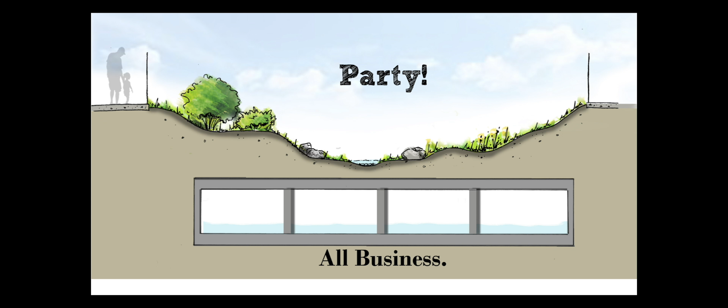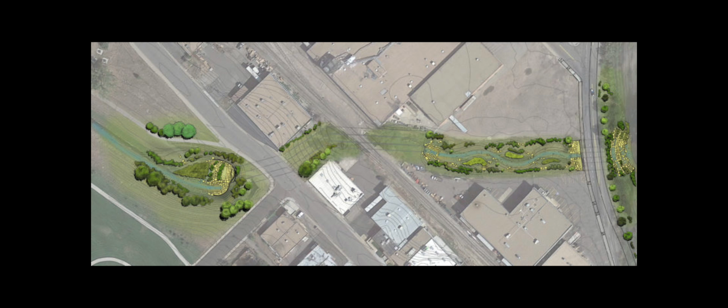However, as compelling as a mullet may be, we're actually here to talk about a reverse mullet, if you will. Party on the top and business on the bottom. The improvements at Sanderson Gulch in Denver include a sinuous open channel stream with ecological diversity, improved habitat, and water quality, which sounds like a party.

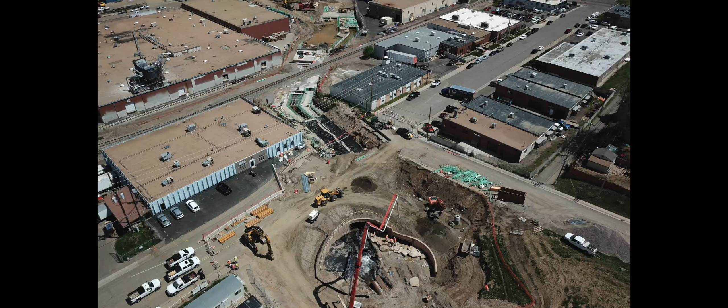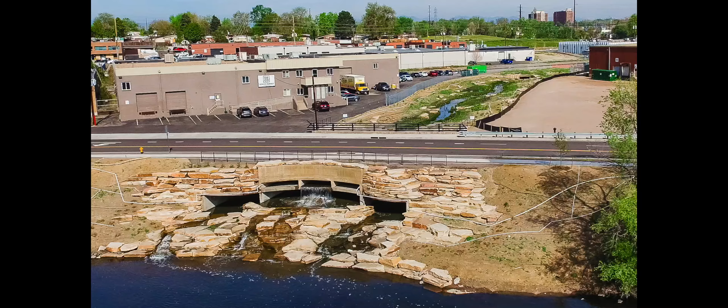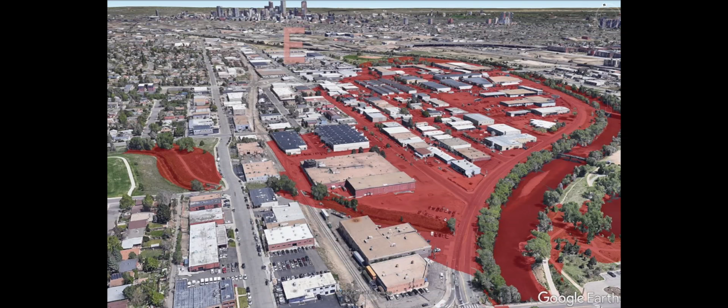All of this is layered on top of a network of braided box culverts for flood conveyance, which is all business. Sanderson Gulch is a complex stormwater system with enhanced open space and stream function for small rain events and box culverts to bypass large storms. These improvements result in the containment of 100-year storm flows and removed 107 parcels, including 102 structures, from the regulatory floodplain, reducing risk for businesses and residents in the area.

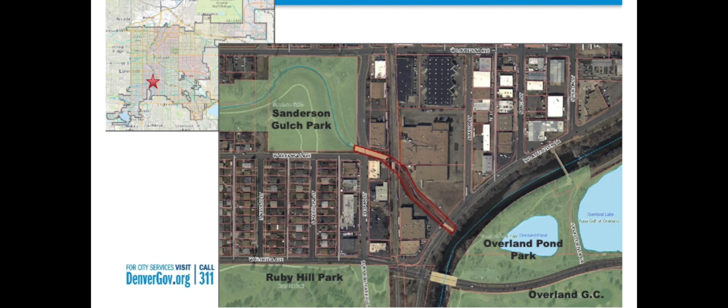I'd like to orient you on where we're at in the city and county of Denver. Right now we're at Sanderson Gulch's outfall to the South Platte River. Sanderson Gulch is a tributary channel to the South Platte River. The project extents basically go from the confluence where we're standing right now up to Sanderson Gulch Park, which is near Lipan Street. To the south of the project location, you have Florida and the Ruby Hill neighborhood, and to the east, you have Overland Pond Park.

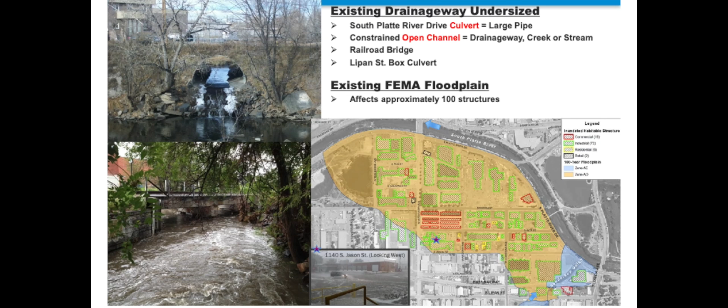What I want to talk to you about is the existing conditions before we got to this point. The channel through this highly industrialized area had undersized culverts. It crosses a BNSF bridge that was dilapidated and looked like it was ready to fall into the creek. The channel and the culverts from Lipan on down were basically undersized. So we ended up with overtopping of Lipan Street and South Platte River Drive on a frequency of a 10-year event. So we knew that we had a highly constrained, channelized section with a frequent flooding history.

After the 2013 floods, the city and county of Denver identified this as an area where they'd like to reduce flood risk. So the city's primary goals were to reduce flood risk, increase conveyance capacity, and create a high-functioning, low-maintenance stream in a highly urbanized area. Some of the secondary goals as we got into final design were increasing water quality in the area via trash vaults and through the vegetation in the channel that we created upstream of the outfall.

The city applied for a hazard mitigation grant, and through a string of events in the design process, they were able to secure about $7.2 million of funding, which greenlit the design of the project. At that point, the Mile High Flood District partnered with the city and county of Denver. Icon Engineering developed a fantastic project team to take a holistic approach to making this corridor better. All of these goals needed to be achieved while adhering to federal and state grant requirements on a very strict schedule, both for design and construction.

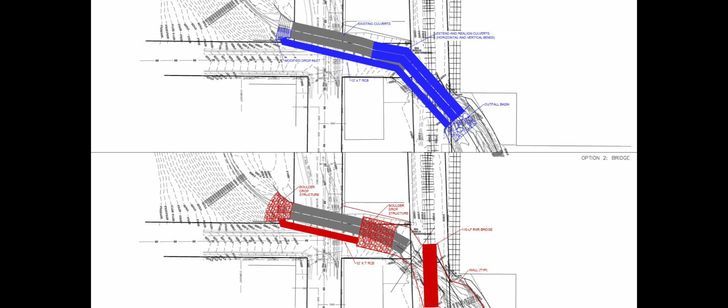The project design team looked at many alternatives for conveying a large amount of stormwater through this confined space. We looked into nearby land acquisition and the feasibility of adding more upstream detention to reduce the peak flows. These alternatives were found to be cost prohibitive and too time consuming for the project and grant timeline. Additionally, we evaluated many culvert arrangements and bridge replacement options for the railroad and 2 roadway crossings through this reach.

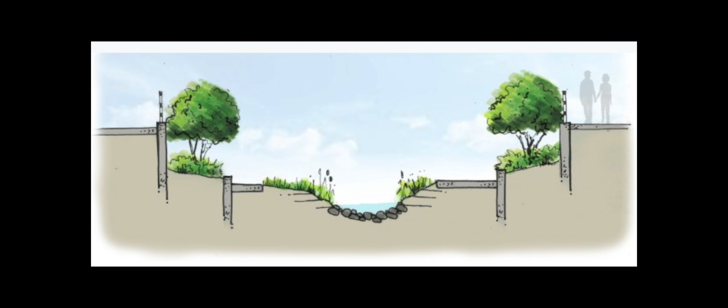Several variations of high-capacity open channels were considered as well. Unfortunately, these options included tall retaining walls with confined channel conditions, significant flow depth with high channel velocities and shear potential, future maintenance challenges, and other safety concerns. And the project goals were just not being met. The design team recognized that more innovation and creativity was necessary.

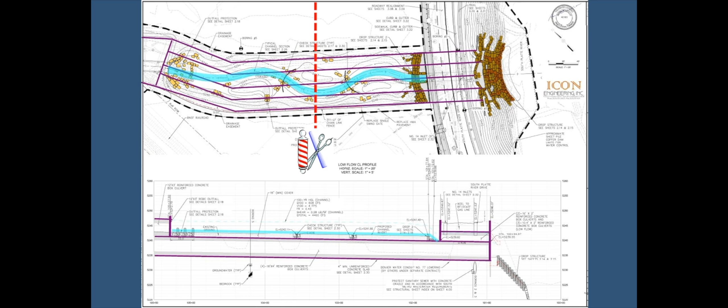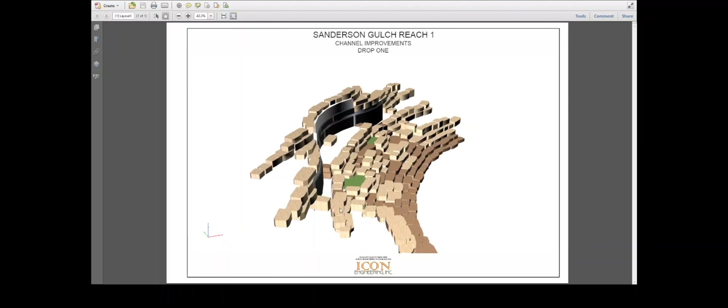We started developing a concept that includes functional open space with an active channel that also includes a complex stormwater bypass system below it for safely conveying larger storm flows. The design elements became complicated, and as part of the process, we developed 3D design models for the large network of culverts and for the boulder structures in the channel. This allowed the team to envision scenarios and figure out the best configurations for design. It was also helpful to provide these visual aids to the contractor for construction.

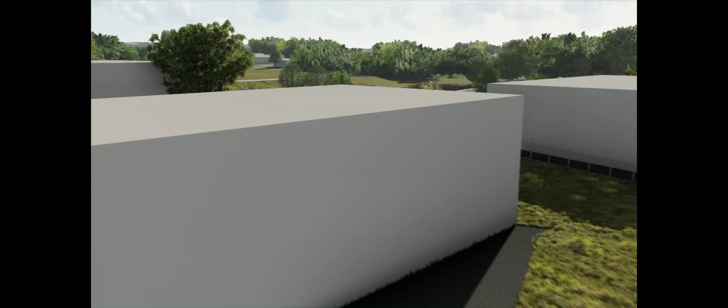Let's take a closer look at the new stormwater system with a digital flyover. The project includes a signature boulder outfall structure at the South Platte River and a meandering multi-stage channel with diverse vegetation. Below the channel and road crossings is a network of culverts that are important for providing capacity to convey large flows. At the upstream end of the project, Sanderson Gulch changes from an old concrete-lined channel into a new step pool structure and naturalized channel.

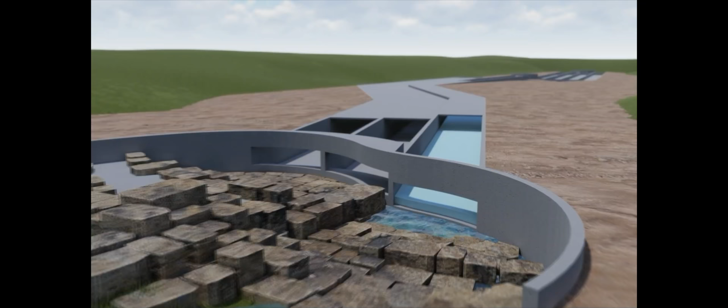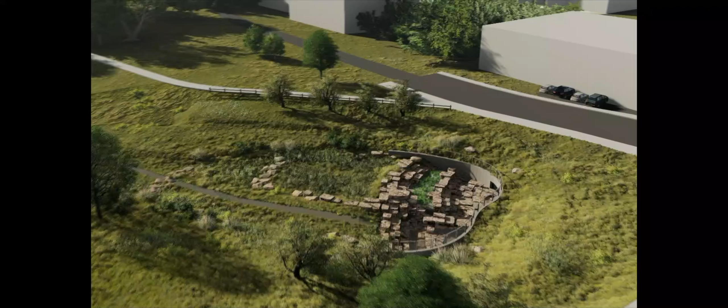As flows approach South Lipan Street, a complex drop structure diverts the base flows and small storms into a water quality vault and 12x3 box culvert. This low flow culvert extends below the roadway and railroad and daylights to the natural channel downstream. Then at South Platte River Drive, the low flows are conveyed through five 2-foot tall box culverts and cascade onto the South Platte River outfall structure. The low flow portion of this system is anticipated to convey a maximum of 600 CFS, which is less than a 10-year storm recurrence.

During major storm events, the upstream boulder structure redirects high flows into two 14x8 box culverts. These high flow culverts transition to four 16x4 box culverts underneath the low flow channel. Total capacity for the combined system is around 4,500 CFS, which will allow for future storm outfall projects upstream and accommodate future 100-year flows.

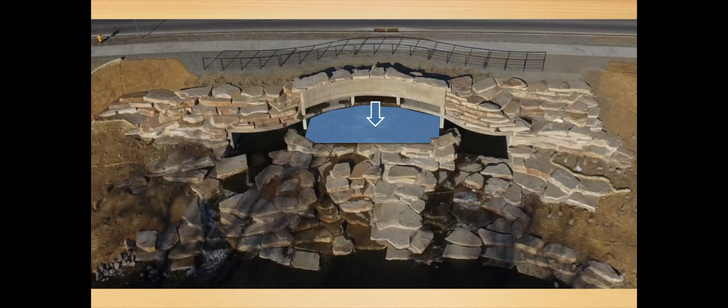At the outfall to the South Platte River, the channel acts as a waterfall from the upper culvert cells and splashes into a center pool. The flows then spill laterally and fill the lower pools on both sides. These pools help dissipate energy, collect sediment and debris, and also serve as a deterrent for culvert entry by people, although the crawdads and minnows seem to enjoy it. Finally, there are several flow paths for water to cascade through the slabstone boulders and down into the river.

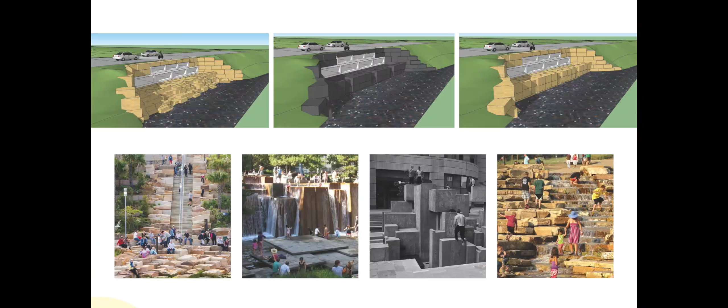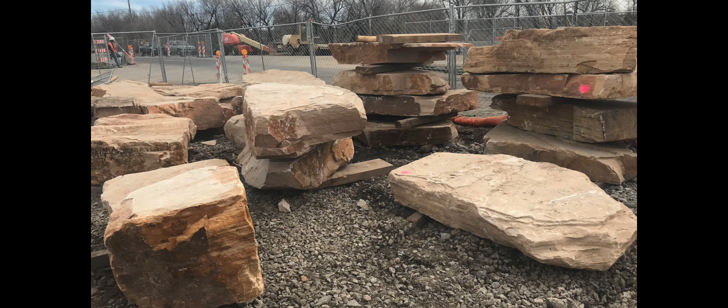As Aaron mentioned, we went through many design iterations to land on the concept for the project. We also went through many iterations to land on the aesthetic design for the project. So as you can see, we've got these very large boulders throughout the entire project. These are a common theme that we use to tie the whole project together. So we began the design process by looking at various material options, including sculpted concrete, standard granite boulders, just standard concrete with form liners. And we finally decided that we really needed to push the limits here.

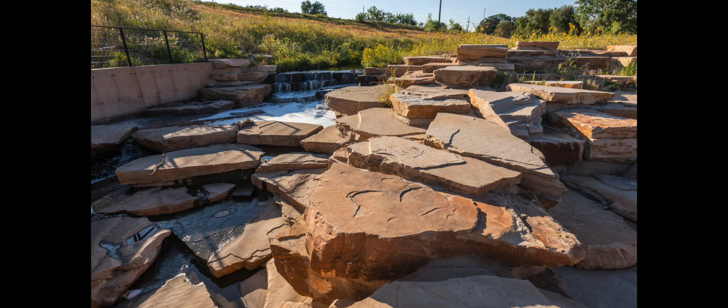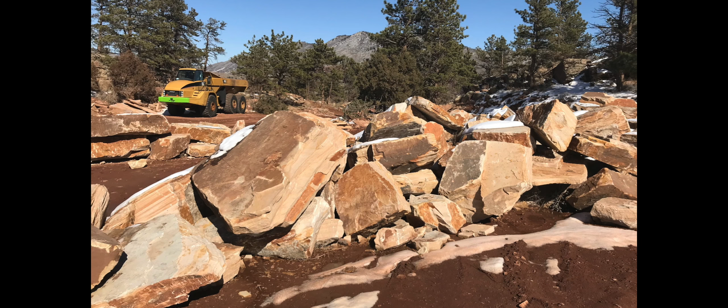And we decided on these quarried slab stones that are actually all sandstone. So we visited multiple quarries and did tests on multiple different types of rocks. And we landed on this product that actually met the structural requirements of the project as well as the aesthetic look that we were going for. So in addition to the boulders, we wanted to really make sure that we were pushing the limits and fusing the natural environment with the South Platte and the meandering open channel with the really urban corridor that this project is located in.

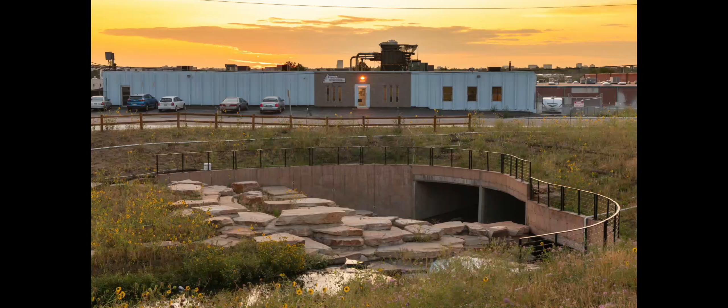We took a look at the concrete walls that we were using for the wing walls and the box spaces, and the design team really pushed ourselves to figure out how we could incorporate that piece of the design with the boulders and the sinuous stream. That's how we ended up curving all of the wall faces that you see, both here at the Lipan structure and down at the South Platte structure. Throughout the entire design process, we constantly considered how people were going to be using this space. We knew that there was going to be a lot of people in and around these areas.

Up here at the Lipan side, we are in an existing park with an existing trail system in an existing neighborhood. So we knew that people were going to be here. While we knew that we wanted this project to be an aesthetic amenity to the community, it is a stormwater facility, so safety was a constant concern. We incorporated many design features to promote safety to the best of our ability.

There is an existing trail here at the Lipan side. We realigned it to keep it away from the box culvert. We added a fence and handrail at the top of the box culvert. And in addition to that, we integrated a wetland bench and rough plants that were chosen for their harsh characteristics to prevent people from cutting down from the trail to the box culvert itself.

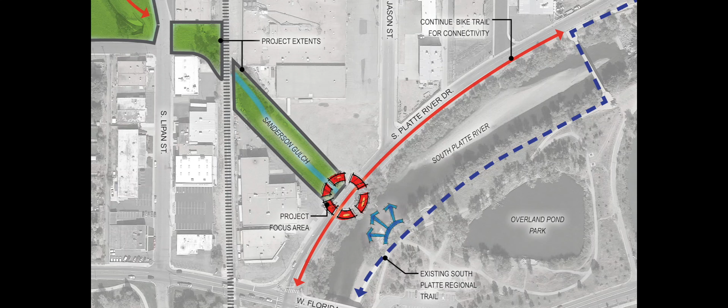Prior to this project, there was no direct pedestrian connection between the intersection at Florida Avenue and the South Platte Regional Trail. But there was a very well-established social trail. So in order to keep pedestrians safe and prevent unintended trails from forming, this trail connection was formalized and the decorative handrail was added to the top of the outfall to help direct pedestrians.

So as you can see, we did incorporate a lot of different features, ranging from the standard railings to a more integrated approach with the vegetation. Josh is now going to be sharing a little bit more about our approach to vegetation.

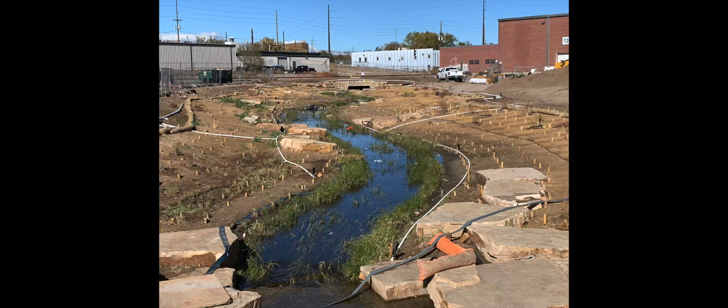Hello, I'm Joshua Eldridge with Great Ecology. I'm standing in what's called Mid-Gulch. This is the section of Sanderson Gulch that is directly over the concrete box culverts you just learned about. The vegetation you see around me is less than a year old and contains more than 30 native species, most of which are seeded or planted.

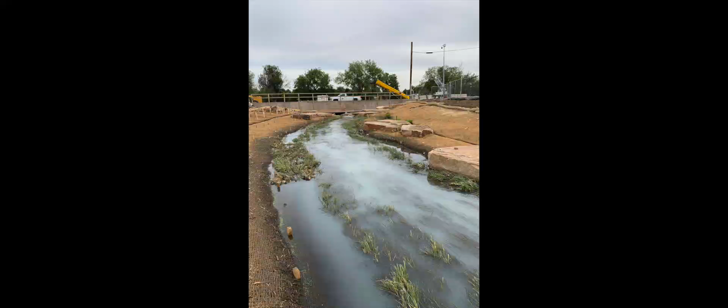The meandering low-flow channel is comprised of void-filled riprap and wetland sod and replaced a rock-lined linear channel. The bottom of the low-flow channel is approximately 18 inches above the concrete box culverts, and the top of the slopes are about 4 feet above the box culverts.

The design is highlighted by 3 overbank swales like this one that provide water quality benefits as well as habitat diversity. The corridor is fairly narrow and short, only about 400 feet long by 80 feet wide, but we were able to fit in a lot of natural features. We really helped provide resilience against the flashy storm hydrographs that this watershed sees. What we were able to do is create a multi-stage channel that is really able to slow down the water and spread it out so that we can contain some of the sediment that moves through this watershed.

We've had multiple storm events this season that saw these basins fill with sediment, and yet the plants were able to pop right back up, seemingly unaffected. We've also seen the added benefits of wildlife habitat. We've seen killdeer, lizards, snakes, rabbits all call this watershed home, as well as countless raccoons and waterfowl.

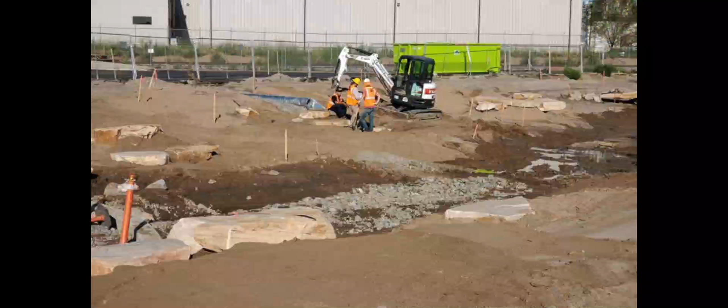One other cool feature about this project is we were actually able to build in a series of test plots testing the effects of wood chips incorporated into topsoil to affect native species establishment. We utilized wood chips donated by Denver Parks and Recreation at a ratio of 1 part wood chips to 4 parts soil to manipulate soil chemistry.

The wood chips were mixed by the landscape supplier and then placed in alternating test plots where we had no wood chips and wood chips. And we alternated that throughout this corridor. That was the only part of the design that changed. All other features of the design, including seed mixes and plantings, all stayed the same.

And the effects are pretty apparent. No wood chips, wood chips. No wood chips, wood chips. You can tell that we have an increase in native forb establishment, fewer noxious weeds, and higher native grass cover in the wood chip plots.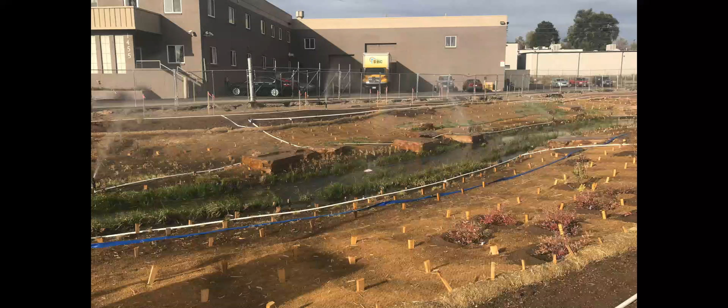The value of this research is that it provides a new tool for land managers and natural area designers to be able to improve native species establishment with less fertilizers and control weeds with less herbicides. Ultimately, this project is going to be non-irrigated. But fortunately, the project partners, and in particular Mile High Flood District, were willing to support temporary irrigation to help establishment. And it was a huge deal in helping get plants established this year.

Establishing vegetation quickly is imperative to creating high-functioning, lower-maintenance systems within riparian management zones. Designing a non-irrigated site with increased ecological function was just one of the challenges that we had with this project. Now Terry's going to tell you more about the construction challenges that we faced.

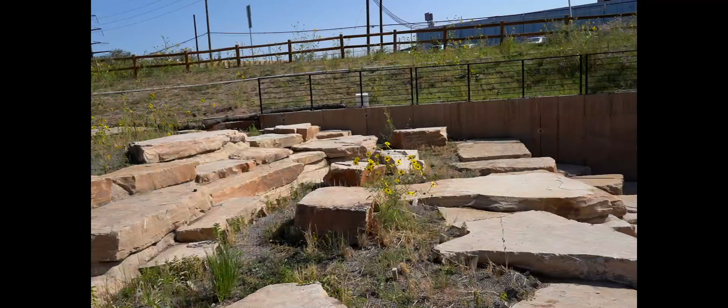Construction of the project started in May 2018 with substantial completion in December of 2019 at a total project cost of approximately $15 million. The project team faced some unique challenges during construction, which I'm here to discuss. First and foremost is water control of an active stream at the bottom of a 7-square-mile, highly urbanized watershed with a 100-year discharge of approximately 4,100 CFS.

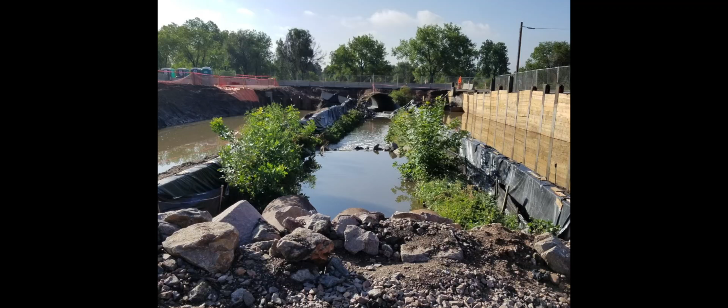This required a phased approach to the stream diversion. For phase 1 of the diversion, the contractor decided to keep the base flow channel in place while excavating up to 10 feet deep on either side of the active channel as shown here. This allowed them to construct a portion of the box culverts on one side of the stream while building a new diversion channel on the other side of the stream.

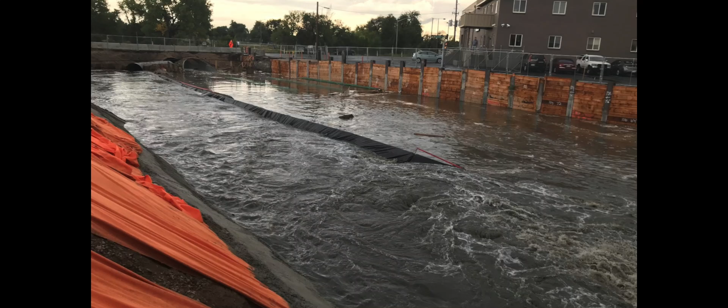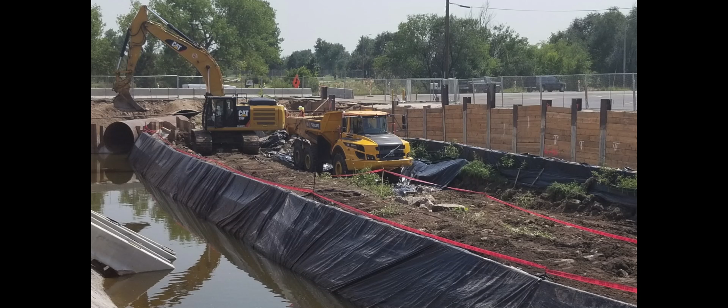Unfortunately, this decision was prone to setbacks, as this midsummer flooding event shows. Rain events of this magnitude were fairly common in the summer of 2018, and this event alone caused a near 3-week delay to construction activities while cleanup was performed. Once their Phase 1 diversion channel was in place, it allowed them to begin excavating the remaining channel section and constructing the box culvert, which once again was not without its problems.

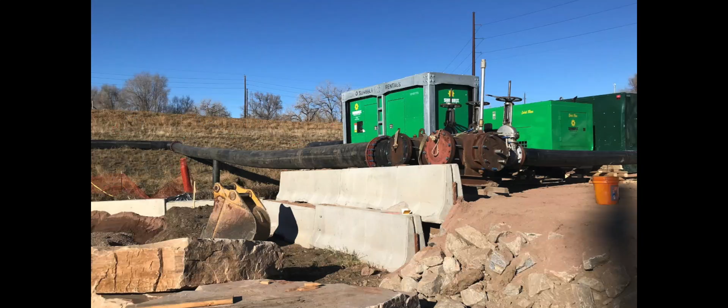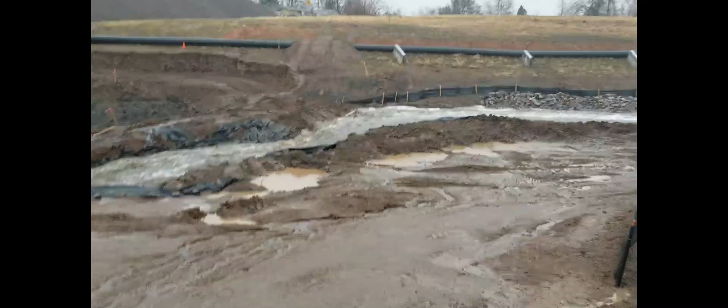Finally, in November 2018, the contractor instituted a pump diversion consisting of 3 12-inch pumps to handle the base flows and small storm events, which also was not without its problems. Here's a quick video of the bomb cyclone event in March 2019. One useful feature of the design was the incorporation of a rat slab underneath the box culvert. This slab provided a stable base on which to work and was also immensely helpful during cleanups.

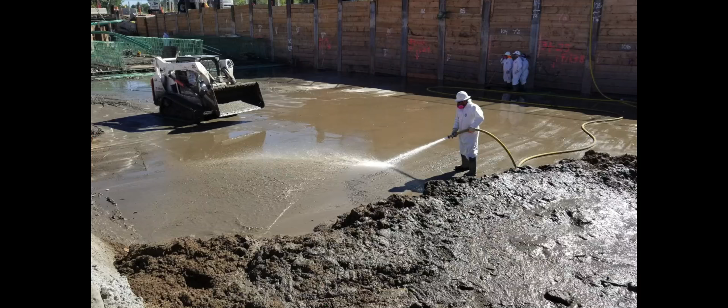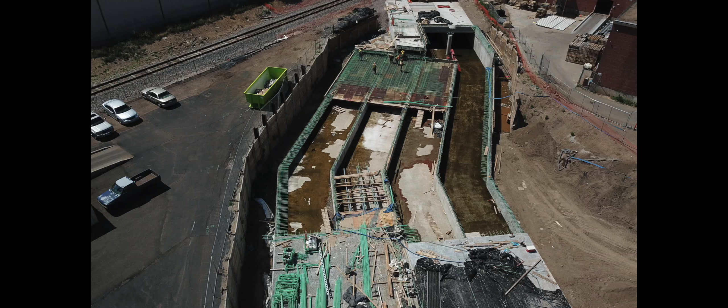The box culvert was then constructed on top of the rat slab. Once the far south cell of the quadruple box culvert was constructed for the length of the gulch, flows were then shifted to that cell, and the remaining 3 cells of the box culvert were constructed.

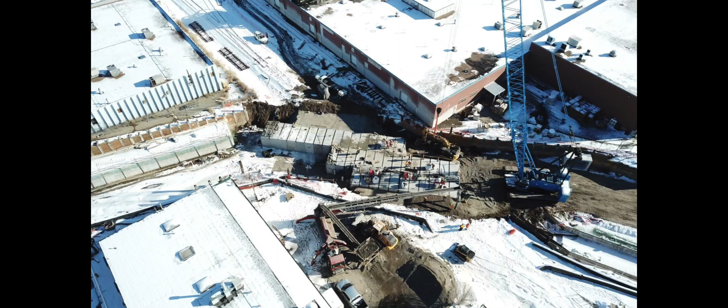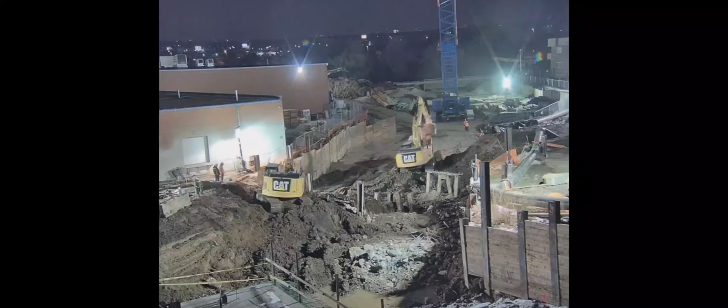The second major obstacle was the replacement of the failing BNSF railroad bridge. Coordination with BNSF on a shutdown date took approximately 9 months. This bridge was replaced by a double 14x8 and 12x4 RCBC in order to convey the 100-year discharge. This work was performed around the clock from a Wednesday starting at midnight, finishing by late Sunday afternoon in February 2019.

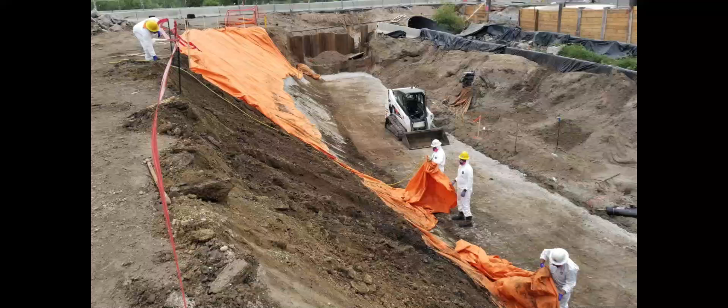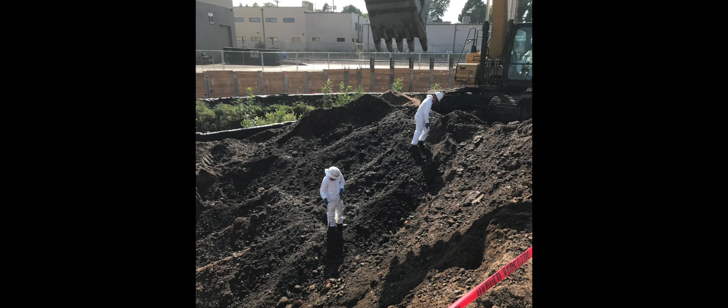Another major complication was the presence of multiple contaminants on the site. In addition to asbestos, the groundwater was contaminated with uranium, and it was also a former Superfund site which functioned as a radium processing facility during World War I and World War II, making glow-in-the-dark watches, among other things. Facilities such as these were written about in a book and upcoming movie called The Radium Girls. Although the site was remediated in the 90s, some radium tailings remained which the project was responsible for.

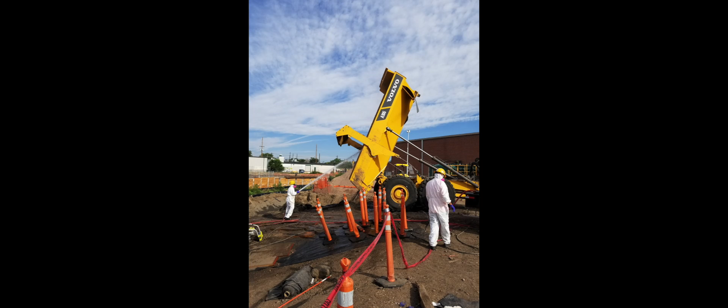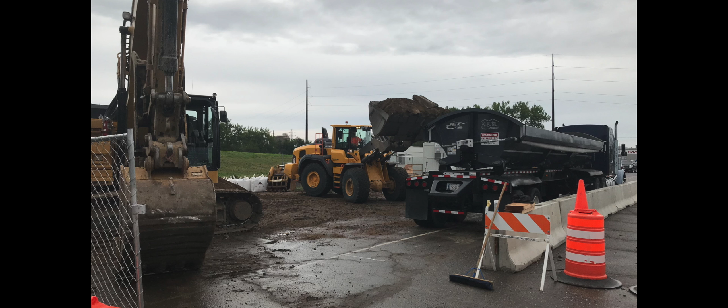As a result, radiation technicians were on site throughout the project scanning with Geiger counters to detect spikes in the background gamma radiation level. In this case, the techs were scanning an area that was contaminated with both asbestos and radium. Any soil encountered with a gamma radiation level over 30 microroentgens per hour was segregated and typically hauled to Clean Harbors in Deer Trail, Colorado. In this instance, a higher level of radium was discovered in this rock, which had to be disposed of at a facility in Louisiana, costing approximately $10,000 just for this single rock.

I should mention that overall residual gamma radiation levels were very minor, typically just over the EPA threshold of 5 picocuries per gram of soil. In fact, you'd get a higher dose of radiation by eating approximately 22 bananas than you would from the site.

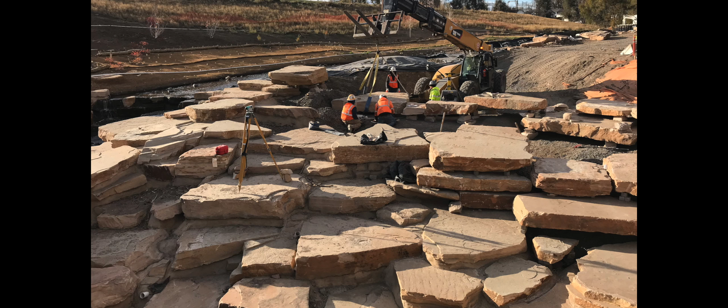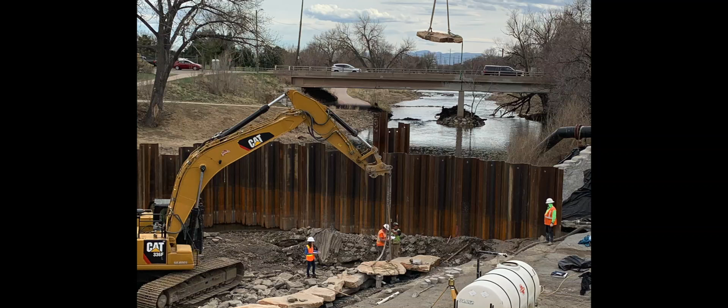The quartzitic sandstone boulders are certainly a highlight of this project, but installation was not without some complications. Arranging the irregular blocks to complete the puzzle was difficult at times. Icon Engineering and Valerian devoted close to full-time staff on site to support the boulder placement effort. Overall, this project required an extraordinary amount of teamwork and coordination to accomplish the goals we set.

One great example is the Mile High Flood District helped streamline the site stabilization and revegetation effort by contracting the work directly with Habitat Management. Their expertise and assistance with pre-growing and installing wetland sod and plantings was essential for the channel's success.

So as you can see, we've achieved a lot with this project, and a few accomplishments that stand out in our minds are: we have a stormwater system that removed over 100 properties from the floodplain. We provided trail connectivity for South Platte River trail users. The project delivers cleaner water to the South Platte River and increases ecological diversity. We really pushed the limits with creative design.

And all those things are great, but we really had two primary goals, and I think we've come here and accomplished it. One was to prove to you that we should win the CASFM Grand Award for Excellence, and two, we really accomplished our reverse mullet.